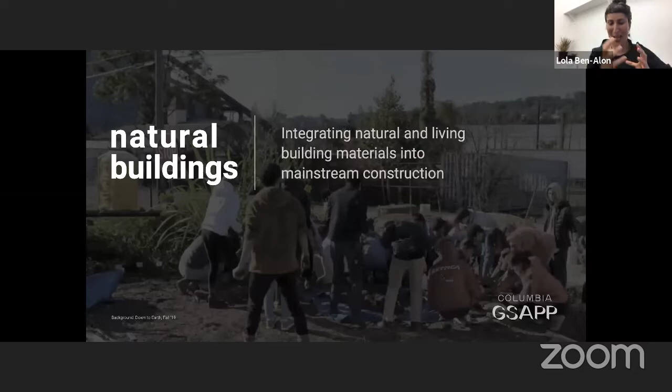As Amal mentioned, since the beginning of my engineering studies, I was really fascinated with non-conventional building materials. In this photo, you can see me at the engineers building competition that tests students' ability to use structures that are efficient in terms of their strength to weight ratio.

In my structure, I incorporated materials from the aviation industry that are known for their really good strength to weight ratio. Not only did I win this competition, but I was also the first woman to achieve this award. We'll go back to this point of diversifying the building industry at the end of my presentation today.

Parallel to my engineering education, I became passionate about user interaction and the mechanisms behind our everyday commodities. I co-founded the Experimental Art and Architecture Lab at the Technion in Israel, where we developed and exhibited critical projects in public venues, museums and galleries in Israel and around the world.

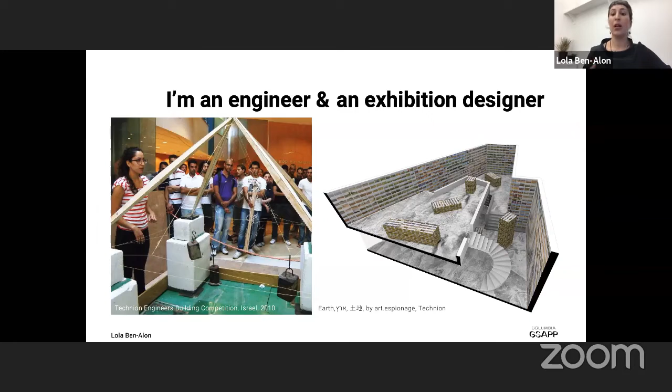This project is called Earth, or in Hebrew Eretz, or in Chinese. It is a trilogy of installations that question the role of the artist and the art trade in a global era, and specifically the mechanisms behind sourcing art from different locations.

As part of this project, we traveled and documented artists in Yiwu, China's international trade city, where 70% of the world's paintings are made today. We traced the path of art production by sending 1,000 photographs of Israeli landscapes to those factories, sweatshops, namely in China.

Most importantly, this work was about calling into question the socio-cultural implications of consuming art that goes through a supply chain in which the actual artist is anonymized and de-identified.

We wanted to bring the sweatshop artists to the forefront, and this is the opening in Shanghai, where we celebrated the artists' artwork, who were present there with their families.

In my current work, I use these perspectives to inform my research and teaching, merging these broad interests of building construction, new materials, supply chain mechanisms, and critical thinking.

What I already knew, as well as you know, is that although each of these building materials were initially taken from earth—fiberglass comes from sand, construction steel from ore-bearing rocks, and concrete from limestone—they had to go through complex processes to become the building products we know of.

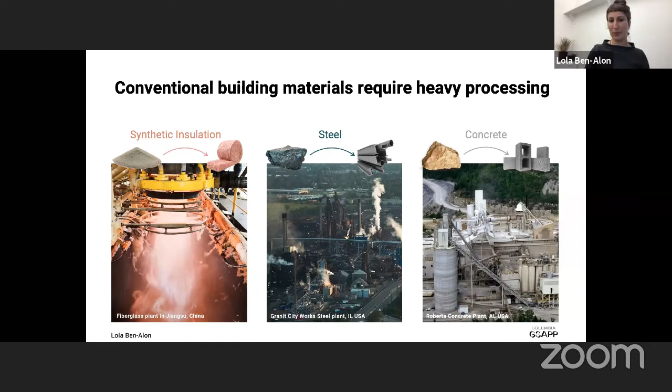What keeps the building industry behind at business as usual is not necessarily lack of data—there's a plethora of data out there—but it is how that data is presented.

Many investments are located here in making improvements into energy generation, into electrification. But these are very, very costly investments and developments. What we should really do is reduce the energy that is consumed in the first place.

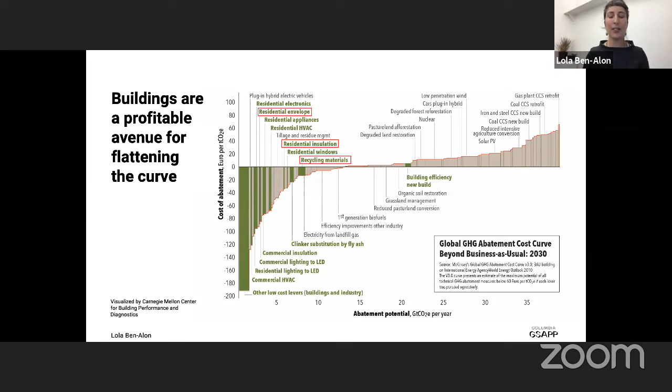When we look closer, we can see that the more profitable avenues are in investing in the built environment. Specifically, my work is motivated by the repeating and accumulating impacts that are dictated by the building envelope and its properties.

My point of departure is in building envelopes that use natural and living building materials. These types of materials are defined as readily available, minimally processed, non-toxic materials that are community engaging, namely farm to building.

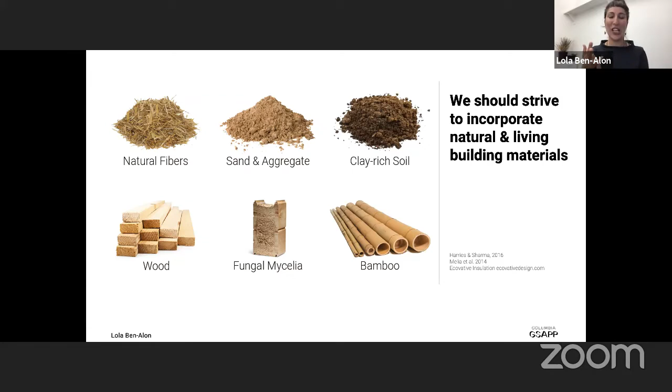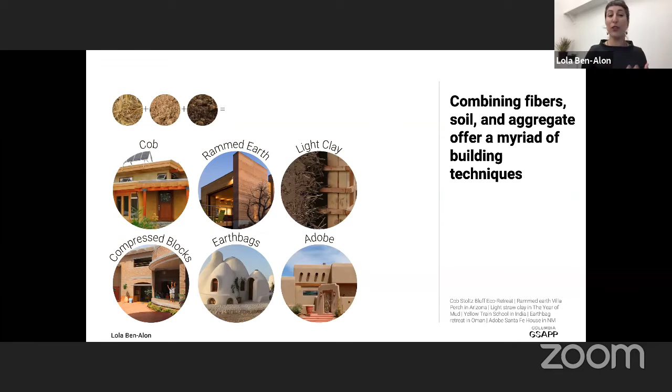And specifically, the combination of earthen and bio-based materials include fibers as a tensile strength provider, sand or aggregate as a compressive strength provider, and clay as the magical binder. And the various combinations of these raw materials produce a diversity of styles and techniques.

Of these various techniques, I will focus today on cob, rammed earth, and light straw clay due to their broad range of styles and thermal possibilities. Cob is a monolithic sculptural technique. Rammed earth uses formwork and mimics the process of sedimentary rock creation. And light straw clay is an insulative infill tamped within a structural frame.

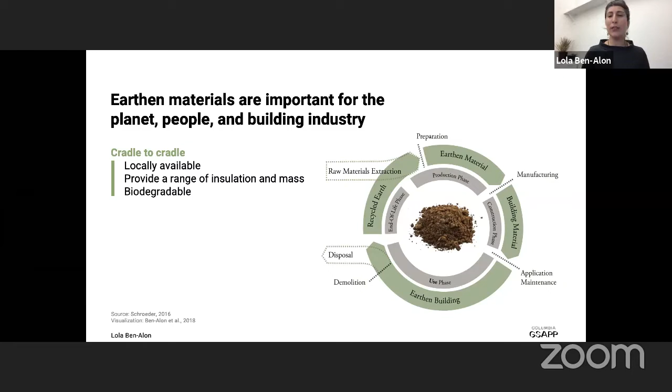They have high thermal inertia and high grade capacity, which make them act as a flywheel of indoor relative humidity, so they were shown to provide relative humidity levels that are optimal for human health. Their permeability makes them a good autoregulator, and their mass results in quieter spaces, and they buffer electromagnetic fields, which is an increasingly important feature, especially in urban settings.

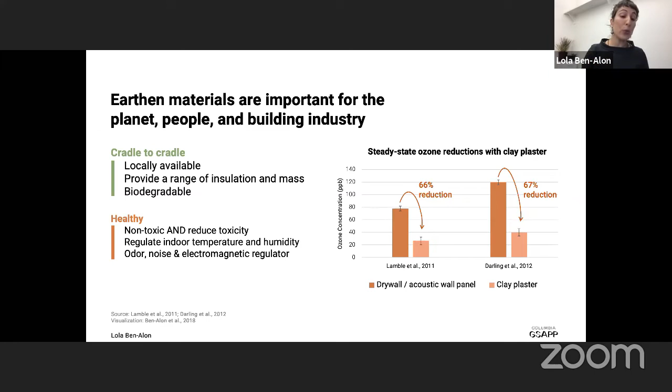And while it seems totally out of our focus, Earth still shelters 3 billion people around the planet, and it is a vernacular building material in Europe as it is in Africa. Therefore, this material that has proven itself for a millennia should be enhanced rather than replaced by industrialized practices.

Earthen materials also promote community engagement where everyone can participate, including kids and elders. And lastly, earth is all around us and just underneath our feet, and can be used from the foundation excavation of a building project. So it can be dirt cheap.

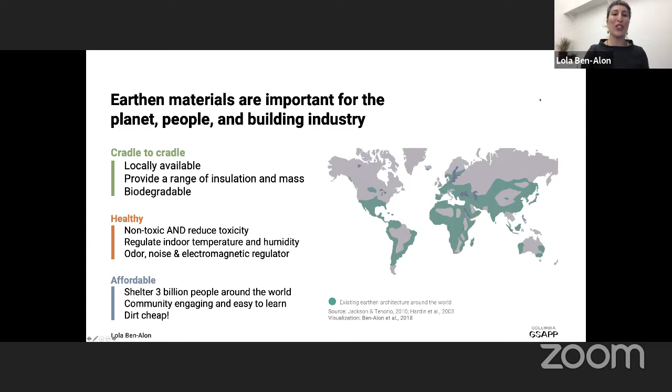So just as 'you are what you eat' rings true and has generated an immense industry of healthy foods, so does the spaces we live and work in affect our life and health. And the trend of having healthier and low carbon materials will only increase in the next few years. It is therefore our responsibility to make sure this growth is made sustainably.

So as part of this growth, our challenge is to ensure that as building professionals, we vote first of all, and also we vote with our design decision making. So the growth of building materials needs to follow responsible growing practices, very similarly to how permaculture and sustainable farming work for food.

So to ensure a sustainable catalysis of an industry, we need to investigate how to properly integrate natural building materials into the mainstream construction. We first need to address a technical gap due to scattered data, to ensure we have adequate performance data for different climates, right?

We also need to address a perceptual gap that I will show you later on. And there's also a major regulatory gap where omissions from building code make it harder to achieve a building permit for projects like low-income housing. And field and professional development in turn is pushed back. And lastly, with lack of professional development, earthen building practices really remain in a traditional niche, holding back innovation.

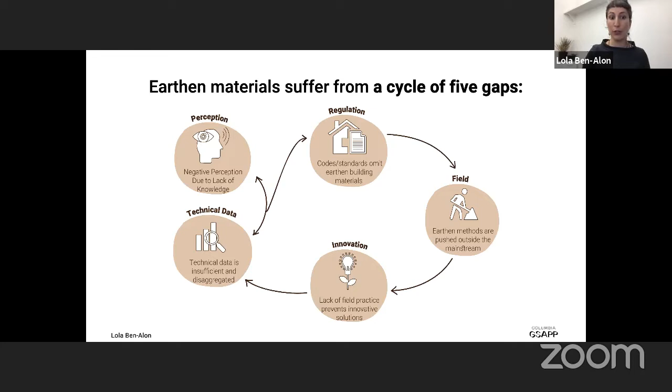My work tackles each of these gaps, and we will review some of the key findings, starting from the perceptual gap.

So one of my major projects started with this global perception survey that asked what people really think about earthen buildings. What is the problem? Why isn't it mainstream? And what was astonishing to see is the strength of the perceptual barrier. So 25% of respondents, who were earthen building experts including architects, engineers, builders, etc., from 12 different countries, mentioned the perceptual gap in the form of cultural prejudice and social perception.

So how do we overcome this negative perception? We use appropriate design and testing protocols. Earthen materials are perceived as low-tech, but they can act as a high-tech material. Appropriate design of earthen structures should include, first and foremost, a good pair of boots — a high footing — and an umbrella — a deep roof hang — to reduce rain-driven and water erosion.

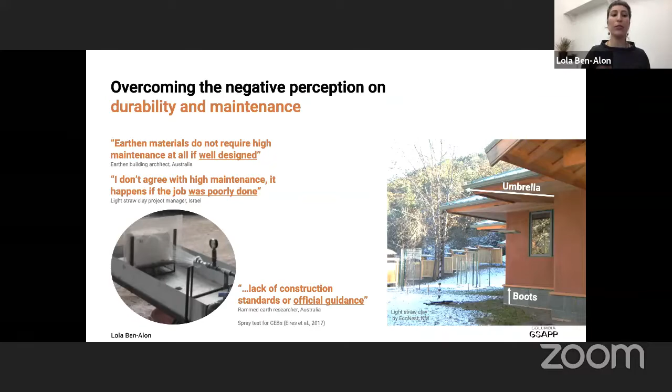And there's also the perceived limited building height, but actually earthen infills and clay-based interior finishes can be applied in any scale. And these options are developing in places like Germany and New Zealand, where great earthen building codes exist.

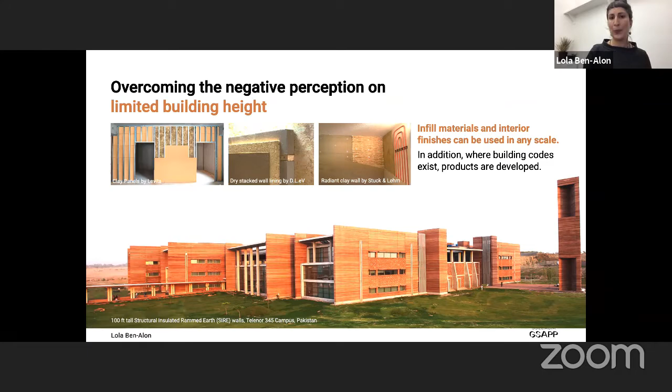So now that we know more or less how to change perception, we need to enumerate, to prove the environmental urgency of natural materials to influence building policy. And I'm an engineer, so I'm going to give here some technical slides, so bear with me.

Before we dive into these few technical slides, I would like to emphasize that building science and technology, very similar to engineering, can be a very technical field, and therefore we need to form ethical principles to choose what direction we are going. We need to ensure we draw on our knowledge and skills to address social problems and to shape building policy.

One of the main goals of this project was to use life cycle assessment, LCA, to form environmental product declarations that could eventually influence building codes. But beyond the environmental impacts, it is really how to address how energy demand and climate change affects societal impacts like access to materials and circular economy.

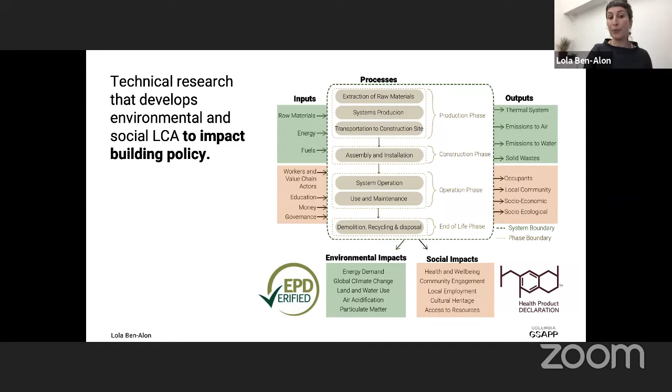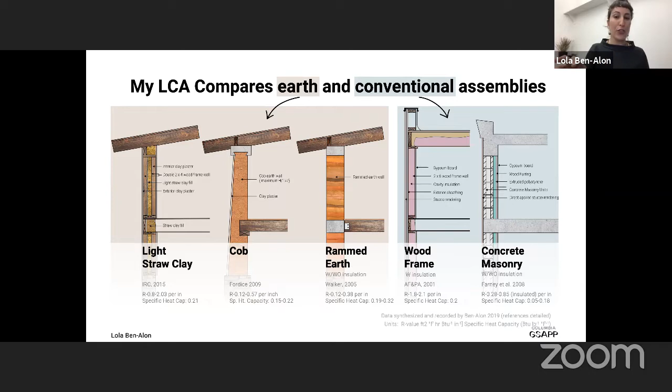When using environmental life cycle assessment, LCA, it is very important to provide a comparison so that the results of the research could then influence policy and decision-making. So in my LCA, I compared between earthen assemblies - light straw clay, cob, and rammed earth - and conventional assemblies, wood and concrete masonry.

It is also very important to choose the right impact factors and to show the aggregated inventories and their circularity effect. When I say impact, I refer to how the various substances from the life cycle inventory - the coal, crude oil, the different emissions - are then factored and summed up to give energy demand, climate change, human health, all these impacts that are then very meaningful for policymakers.

Now, there are many life cycle studies out there for conventional assemblies, but not for earthen, and therefore a life cycle inventory for the earthen assemblies was needed.

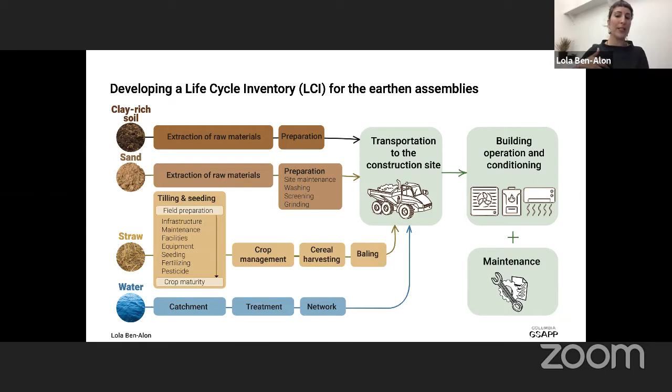And the way to pursue that was by accounting for each of the constituent materials. So for instance, for straw, the inventory includes the various processes from field preparation to crop maturity, including infrastructure, equipment, fertilizing, pesticides - all of this comes into the system.

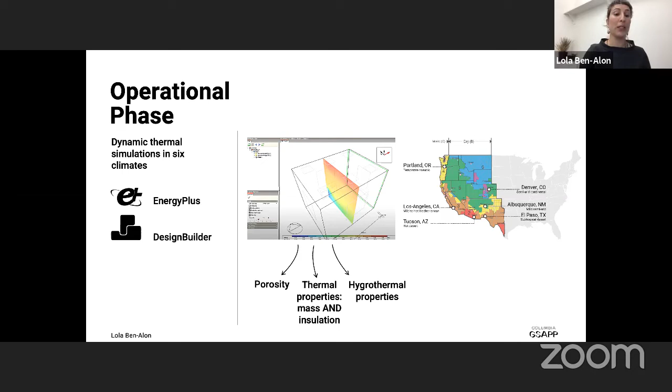Lastly, another important aspect was to not only examine the embodied impacts that are very important, but kind of obvious for earthen buildings because of course it's very low impact, but to also test the trade-offs between embodied and operational impacts over the entire life cycle of a building. So each wall was then thermally modeled for 6 different climates to analyze the cooling and heating energy demand in buildings with these different wall assemblies.

This is a visual summary of the impact assessment results of the embodied phase. And as predicted, the embodied impacts of the earthen assemblies on the left here are indeed much lower than the conventional wood and CMU assemblies.

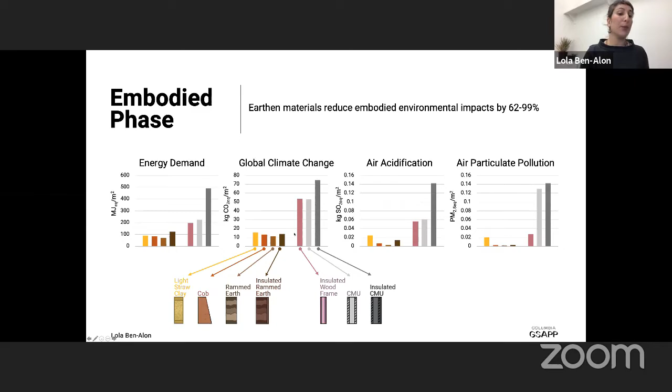And when further analyzing the sensitivity of these results, even the worst case scenario - you can see here the error bar for earthen assemblies is still much better than the conventional assemblies. And what really makes a difference for earthen materials is to really optimize mixtures to decrease wall thickness and to develop test procedures to increase the use of local soil.

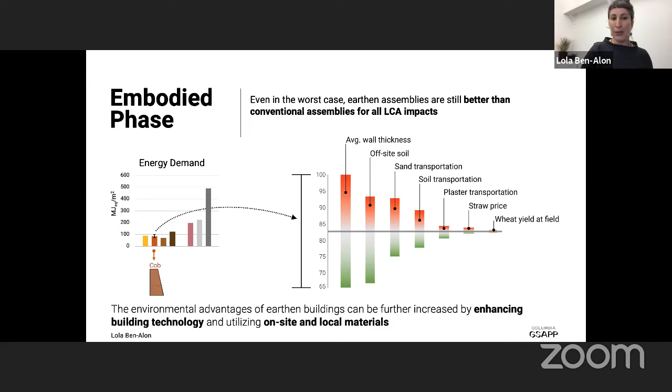So this is where we should focus if we want to innovate these kind of materials. And this is a final summary of the aggregated embodied and operational impacts, including maintenance over a 50-year lifespan for 6 different climates in the US.

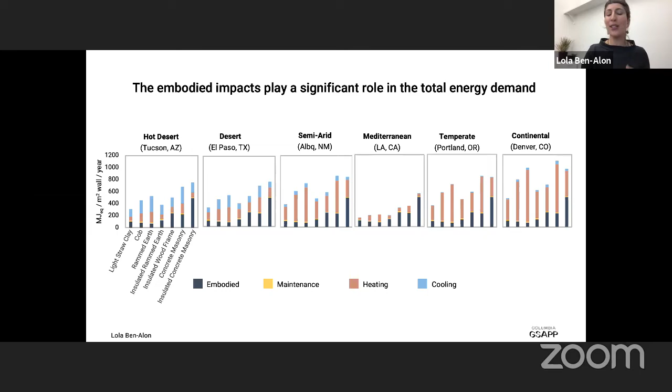Significantly, the embodied performance of earthen assemblies is so much lower, so much better - lower is better in terms of environmental impacts - that it offsets the operational heating and cooling values, even in climates where uninsulated earthen mass doesn't perform that well. So just to illustrate, we get up to 53% energy reductions when replacing synthetic insulation with light straw clay infill, which is both a mass and insulation. So it's kind of a super assembly, which was proven to outperform all other assemblies, by the way.

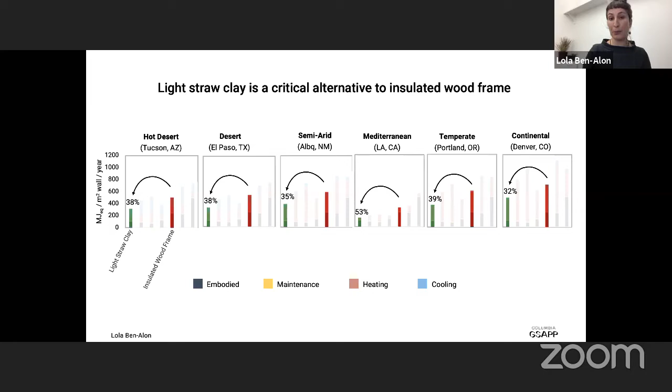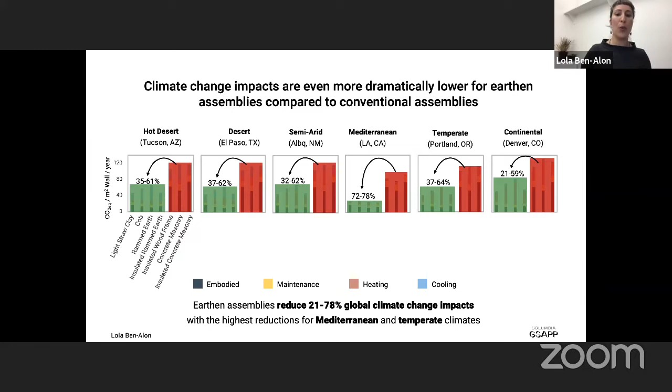These results are even more dramatic for emissions, because emissions result from energy generation, but also from chemical reactions during material processing and fugitive emissions during quarry operations. So overall, in terms of emissions, we get up to 80% climate change impact reduction for earthen assemblies as opposed to conventional assemblies. And I promise this is one of the last technical slides, and we now get to the main takeaways of this study.

So first, energy codes should really account for more than operational approaches. It is not only about adding a good layer of insulation with an R30. It's also about how that insulation was produced, how it is demolished, how toxic it is at the end of life.

Second, we should diversify uniform and insulation-driven energy requirements to capture mass and hygrothermal benefits. In fact, current research suggests that thermal pleasure, also known as thermal alliesthesia, arises from dynamic and radiant environments that can be passively generated by earthen walls.

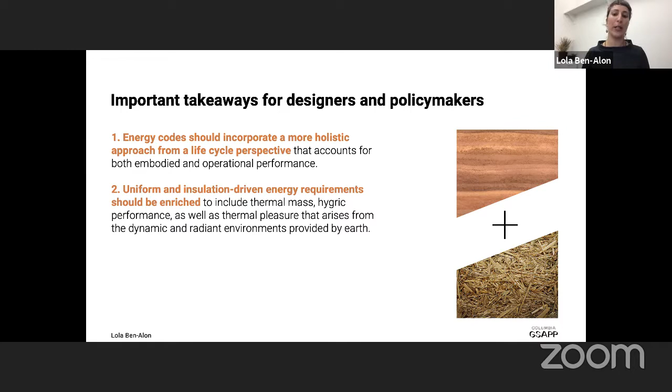And lastly, we need to include earthen and fiber-based materials and assemblies in building codes rather than extracting these materials from traditional practices.

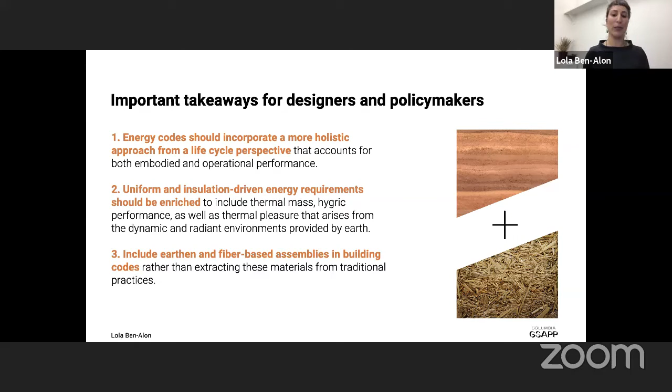These points lead me to my policy analysis and work on promoting building codes. When developing a new building code, the opportunity is in starting with a blank page to mitigate unnecessary complexity that already exists in codes. But the challenge is in using existing precedents to avoid reinventing the wheel. This is one example of how policy analysis looks, comparing different earth building codes from around the world to draw benefits from each document in terms of seismic provisions, LCA incentives, ease of use, etc.

As part of this work, an important collaboration with the Cob Research Institute was formed, and eventually a Cob construction appendix was approved at the International Code Council and will be included in the 2021 IRC Model Code. I think this is a great example of how we can form really good collaborations between academia and the field to catalyze actual building policy change.

So just to explain, the meaning of a building code like this being approved is twofold. In the US, it means people and companies who are struggling with approving structures using this earthen material will no longer struggle - they have a building code. But also, countries looking up to the International Code Council and its documents will be able to adopt the Cob code rather than extracting that traditional practice from their region. They could justify that building practice with this code.

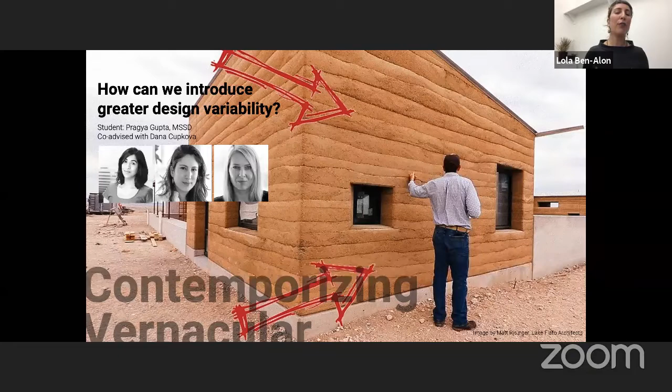The next phase is to expand the boundaries of what is possible through design innovation and digital pathways, and to make these materials more accessible. One of the questions is, how do we contemporize the vernacular? How do we improve assemblies like rammed earth that are very exciting, but are often very limited to linear surfaces?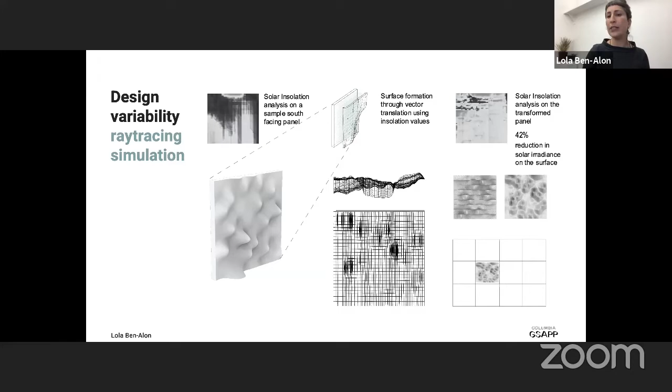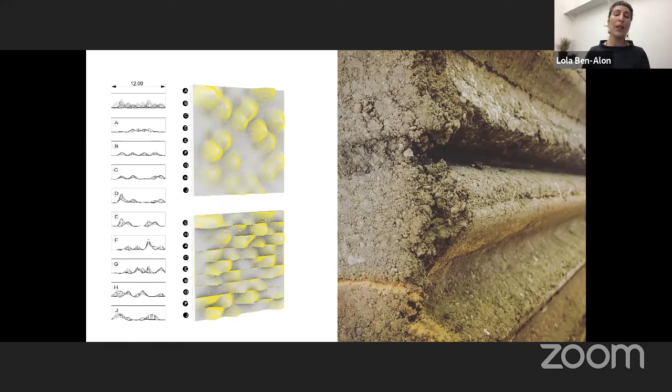So this project asks questions like, why are we changing form? Why should a plain wall not be okay? Rammed earth is so beneficial for hot climates, so we wanted to investigate possible self-shading and self-cooling through geometrical variation. Using a solar analysis, we developed surfaces that increase self-shading by 40%, and then used these raytraced surfaces to develop adaptable formwork that allows new surface tectonics for rammed earth.

So while using unbaked raw soils, we achieved geometrical variability, different combinations, and exciting new avenues for clay-based self-cooling wall assemblies.

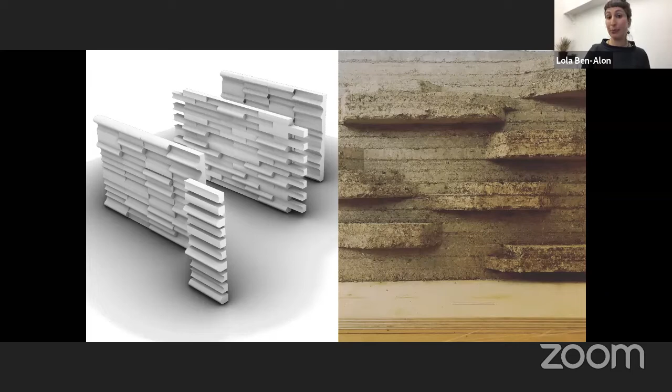We also need to navigate the unique challenges of working with a material that has been moved, mixed, and contaminated for centuries. In this other study, we mapped local Pittsburgh soils - Pittsburgh is a very strong industrial city, so indeed the soils are very contaminated. We conducted chemical and structural lab tests and employed digital processes of robotic manufacturing.

Eventually, through a heavily hands-on process, we aimed to really empower and unite different communities around the city through a participatory exhibition in the Carnegie Mellon Art Gallery. Our team that helped put up the exhibition, as you can see here, all fell in love with the materials after working and feeling the material.

Because eventually it is really about hands-on working with these materials to gain and be empowered with this self-sufficiency. In this project, you can see me applying a final sculptural coat from cob to a shower made from adobe bricks. I gained over 1,000 hours of hands-on earthen construction practice throughout my studies.

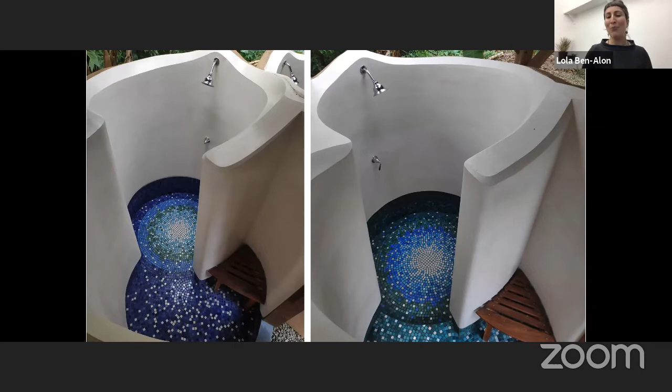This is the shower finished with a layer of white tadelakt, which is a burnished lime plaster, and a tile mosaic. It is stunningly located in the heart of Rancho Mastatal, a Sustainability Educational Center in Costa Rica, which serves as a living lab for natural building materials. You can go there and really experiment with the wackiest structures and make really beautiful things.

Using the right clay mixture can result in a super strong, unfired plastic matter. The use can be from large scale walls, partitions and prefabricated walls to bricks, small scale furniture and artwork. This is, for instance, a technique that uses clay with weaved chopped fibers for sculpting, rather than the usual pottery clay that can be very brittle if it's not fired. There are very few artists who are familiar with this technique.

So we need to conserve these traditional trades while also incorporating new modes of material thinking, which is why I taught Earth to architects and engineers at Carnegie Mellon. This course is called Down to Earth, and it had a lot of work about process. We ask, what does a material want to be? And how do you change your design based on the material behavior?

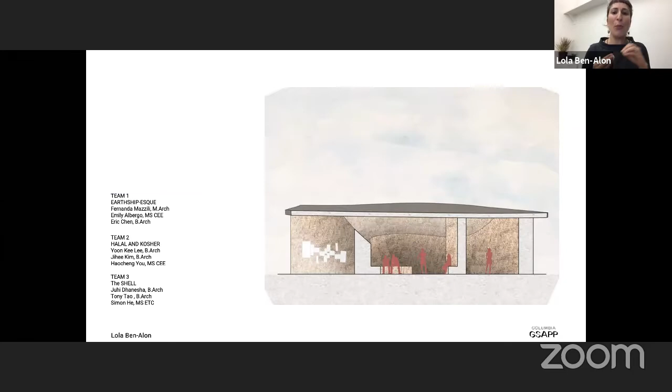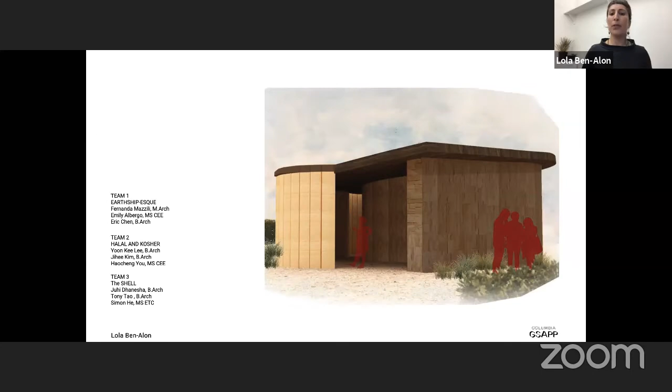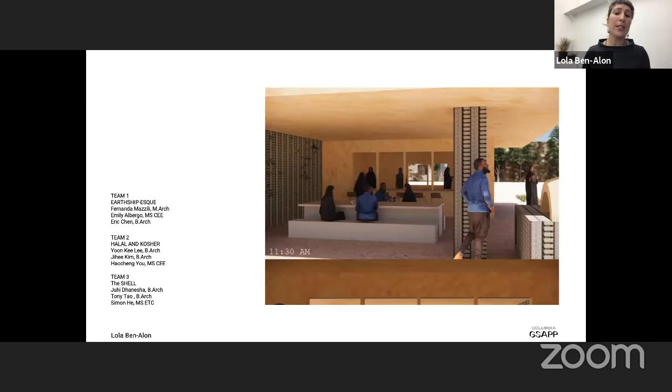Students also designed environments in response to alternative modes of engagement and off-grid resiliency in a desert climate scenario. This was informed by the local availability of materials like clay-rich soils, desert silt, gravel, limestone, and reed. Students really asked themselves how they account for systematic flows of materials, climate, culture, and food as they identified opportunities for intervention.

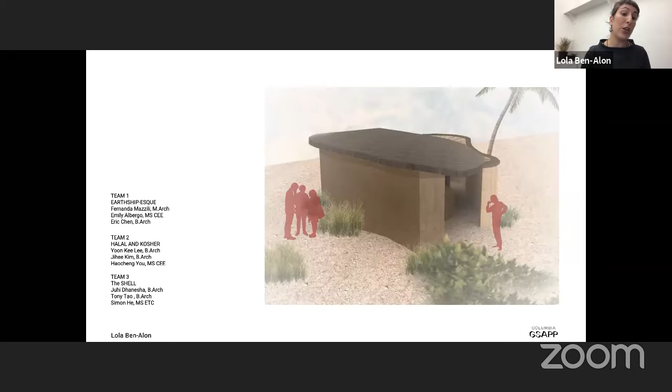So my work catalyzes the broader adoption of earth and natural fiber materials, and there are many other exciting building materials that require similar analysis. I call these the next generation of building materials, and they all require additional environmental, thermal, perceptual, policy, and design innovation, and educational avenues to be implemented in mainstream construction.

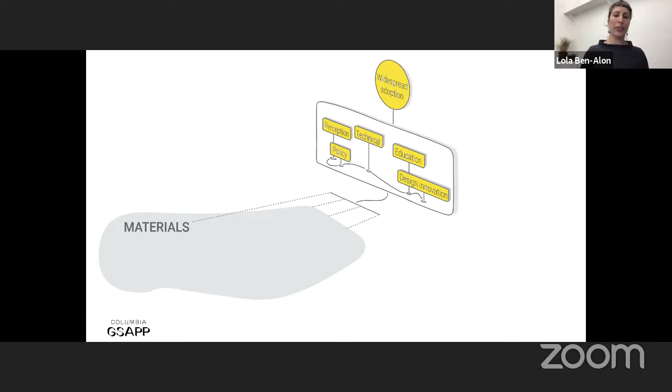And this avenue, this thing about materials, has a whole bunch of research projects that I'm currently conducting. But it's not only about materials. In addition to materials, the next generation of building science and building technology systems include systems and processes that also need to be justified, catalyzed, and implemented.

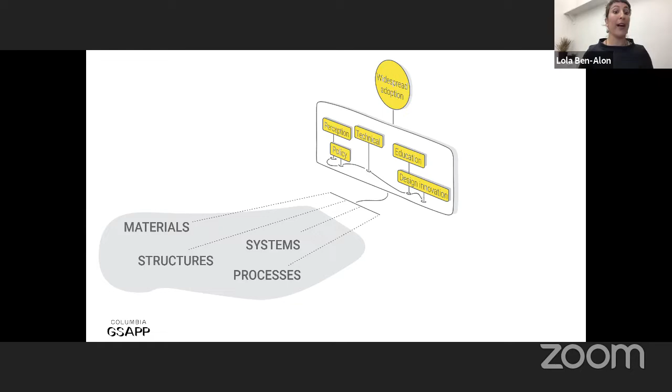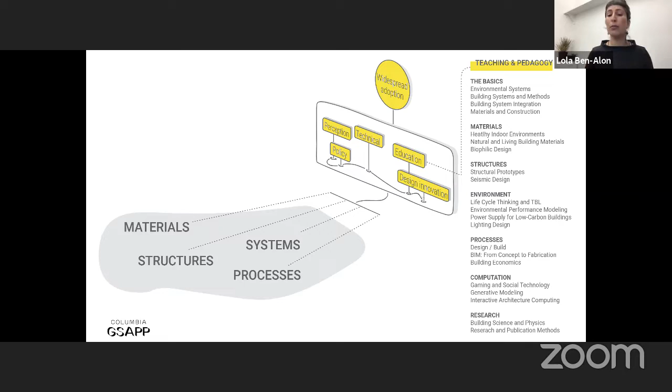The basics is really about understanding how environmental, structural assemblies and infrastructure systems work together. But it's more than that. It's how we catalyze greater connection with our environment through biophilia, the love of life, how we develop life cycle thinking to account for the supply chains and societal impacts of our design decision-making, and how we use technology systems to bridge between communities, to grow food in our buildings, and to provide off-grid resiliency.

This is a good opportunity to shout out to our GSAPP students listening to join me in my outreach ventures. I invite you to actively engage and contribute to different venues, from the Terra Collaborative, which is an all-women organization that provides hands-on natural building training to women and girls, who then become building training providers to their own communities. This is led by Liz Jondro, but also extends to research collaborations and influencing the scientific community. We need to act both bottom up and top down.